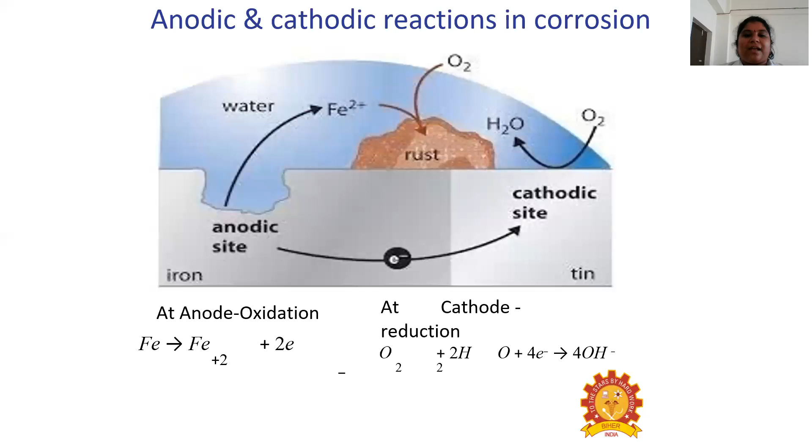But whatever the function may be, whenever oxidation occurs at the anode, the cathode gets rusted due to the reduction reaction occurring at the cathode, because the cathode accepts electrons while the anode loses electrons. Then coming to the anodic and cathodic reactions in corrosion, as we can observe in the diagram, at the anodic side corrosion is happening, but the rust is forming at the cathode side, as we discussed before.

Then what factors influence corrosion? Type of metal based on its nature - we have discussed this previously. Pure or noble metals won't get corroded in their pure state. So some metals like iron, steel, and similar ones will get corroded. So based on the nature of the metal present, corrosion will be influenced.

Then other factors include heat treatment and grain direction, presence of dissimilar metal, anode and cathode surface area, temperature, presence of electrolyte, availability of oxygen, and time of exposure to the corrosive environment. So these are the factors which will influence corrosion.

Then coming to the types of corrosion. First, pitting corrosion - pit means a small inversion. This type of corrosion starts with a small pit, which increases in size until the entire metal gets destroyed. This type of pitting corrosion is seen in metals like aluminum, magnesium alloys, and copper alloys. It starts as a small space and then widens shallowly, eventually destroying the entire metal.

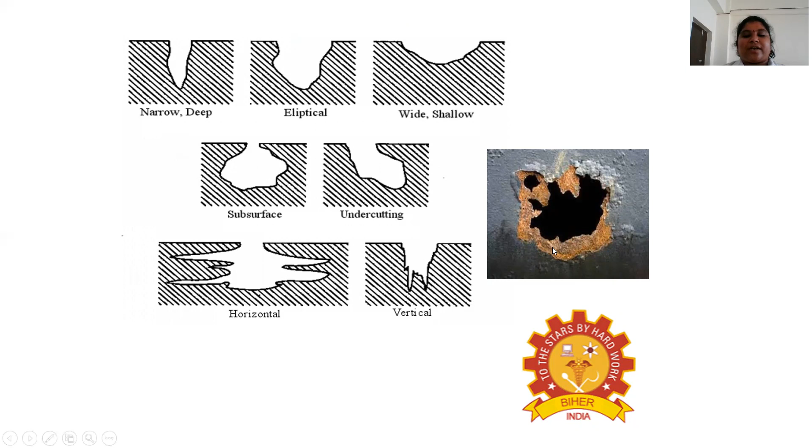Coming to the mechanism of pitting, whenever there is a large cathode and a small micro anode, corrosion happens at the place of that small micro anode, while the cathode gets rusted. What factors influence pitting corrosion? Alloying elements - based on the presence of the type of metal we commonly use as cathode and anode, its alloys will also influence the pitting corrosion.

Surface finish matters for corrosion resistance—a smoothly finished surface won't get easily corroded, while an abrasive surface will corrode more easily. Also, if heat is more, corrosion can be prevented; if less heat is present, more moisture will be there, leading to wet corrosion.

These are the factors influencing pitting corrosion. Another type is stress corrosion and season cracking. As the name indicates, corrosion happens because of stress, nothing but the weight of the sample present on the metal. This is commonly seen in transport services, where we keep weights to move things from one place to another. Because of the more weight on the metal, it will break, and because of that, corrosion happens.

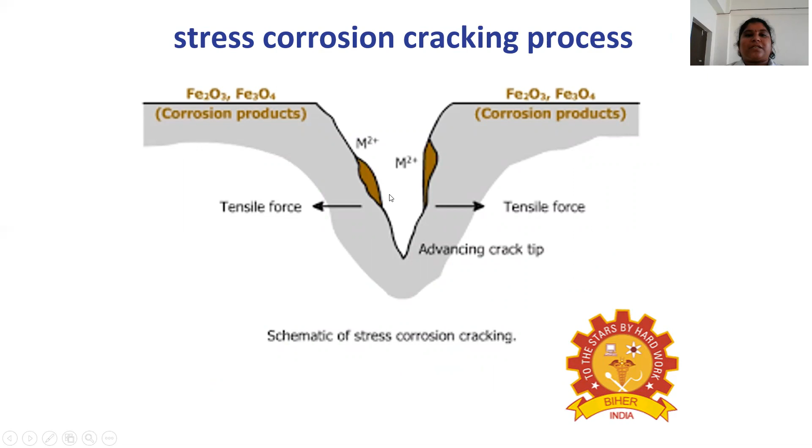It is a combined action of corrosion environment and mechanical stress, which occurs due to poor design or poor maintenance practice. Stress corrosion and cracking is caused by poor design of the metal. Initially there will be breakage because of poor tensile force of the metal, and then cracking forms; at the place of cracking, corrosion starts. That's why we call it stress corrosion and season cracking.

The mechanism involves the corrosive environment, tensile stress of the metal, and susceptible material. Because of these three factors, it will show stress corrosion.

How can we control or prevent stress corrosion? Control of stress level and hardness—whatever material we keep for weight or transport, we need to keep the weight or load according to the tensile force of the material being transported. So controlling the stress level and hardness, avoiding chemical reactions that cause stress and season cracking, controlling temperature, and modifying the design will reduce stress and season cracking.

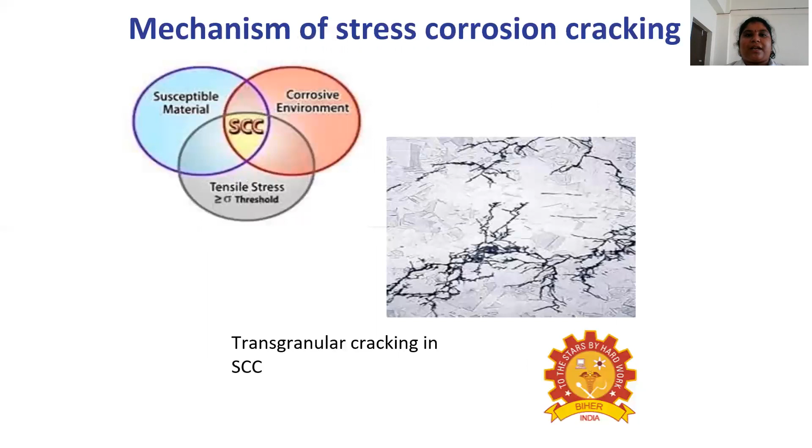So from the start we have seen different types of corrosion and the mechanism of corrosion with its different types. Overall, what is meant by corrosion? It is a natural phenomenon which attacks the metal.

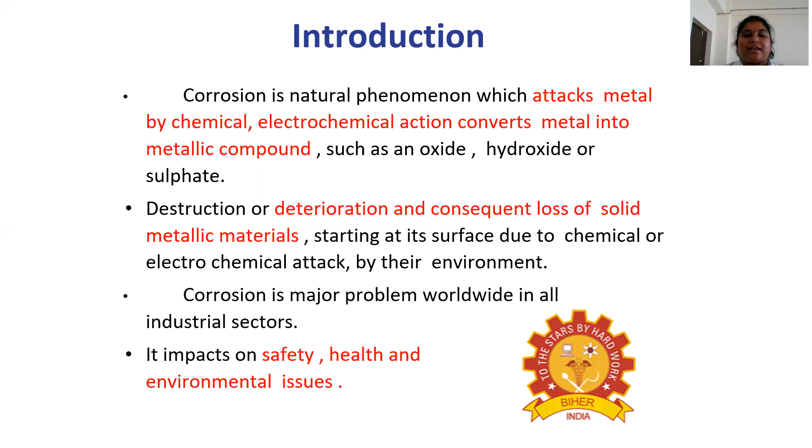Corrosion happens in metals only, where the metal changes from a metallic state to a metallic oxide state due to chemical or electrochemical reaction. This results in the destruction or deterioration of the metal. This is considered a worldwide problem—it impacts safety, health, and environmental issues.

Why does it happen? Whenever corrosion happens, the metal loses its energy and forms metallic oxides. To prevent corrosion, whenever you provide some energy to that metal, it will be free from corrosion.

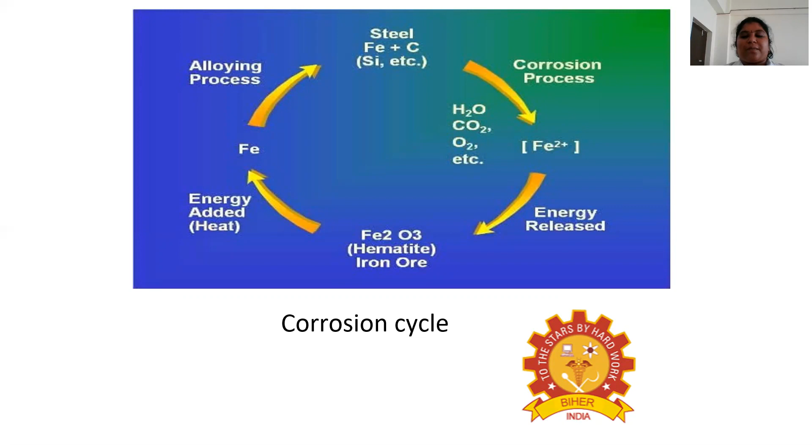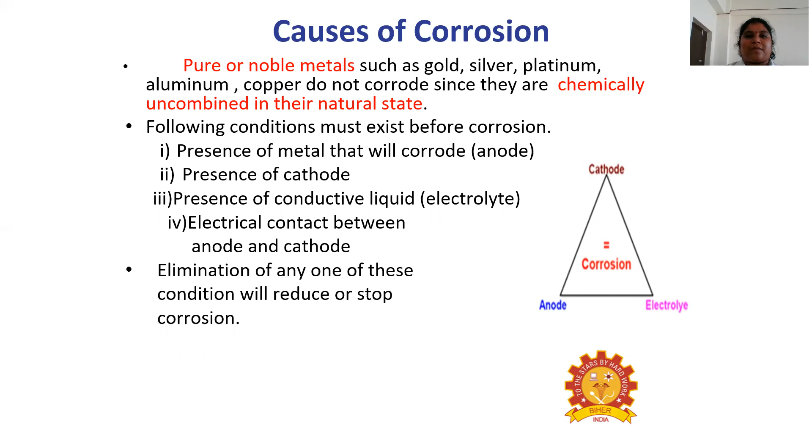What are the causes of corrosion? The presence of a particular type of metal that can corrode as the anode, presence of a cathode, presence of a conductive liquid, and electrical contact between the anode and cathode. Elimination of any of these can reduce corrosion. Some metals won't corrode, like gold, silver, platinum, aluminum, and copper.

This is the corrosion triangle. The main two reasons are atmospheric air and moisture present in the environment. Elimination of either air or moisture from the metal environment can prevent corrosion.

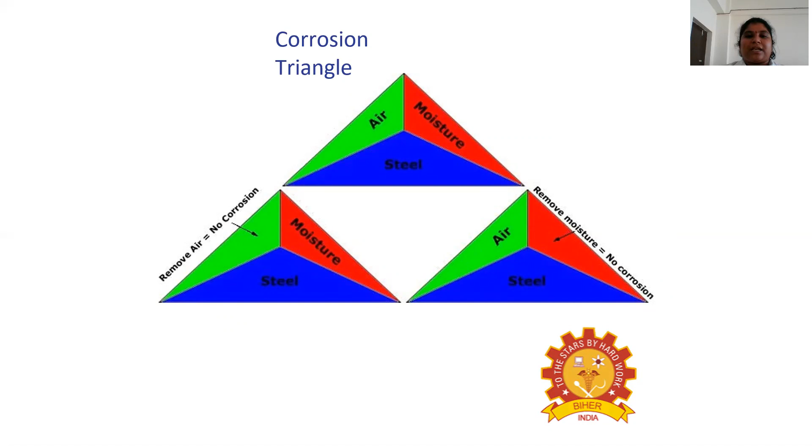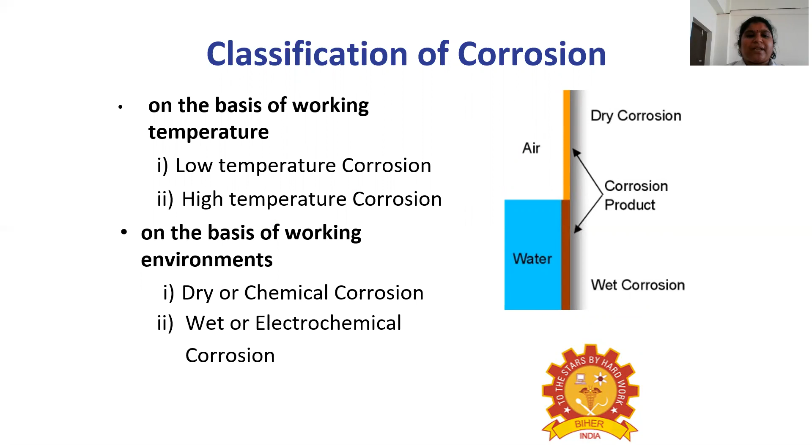Corrosion is classified based on two types: based on the working temperature, and based on the working environment. Some metals are sensitive to low temperature and some are sensitive to high temperature. Based on the working environment means based on whether it's a dry chemical or wet chemical environment.

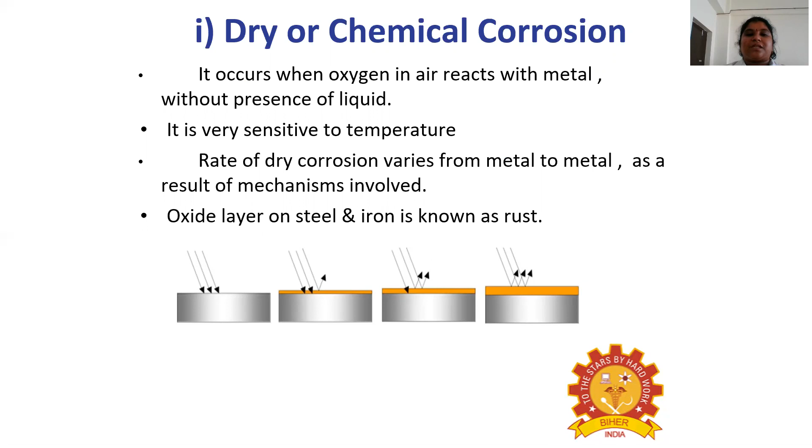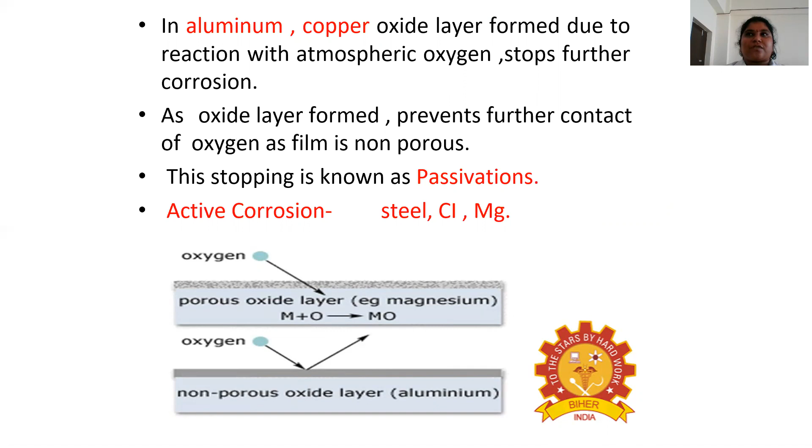The oxide layer on steel or iron we call rust. In aluminum and copper, the corrosion forms an oxide layer that is in non-porous form. This type of corrosion is called passivation, because the non-porous form stops further corrosion of the material. Active type of corrosion can be seen in metals like steel, cast iron and magnesium.

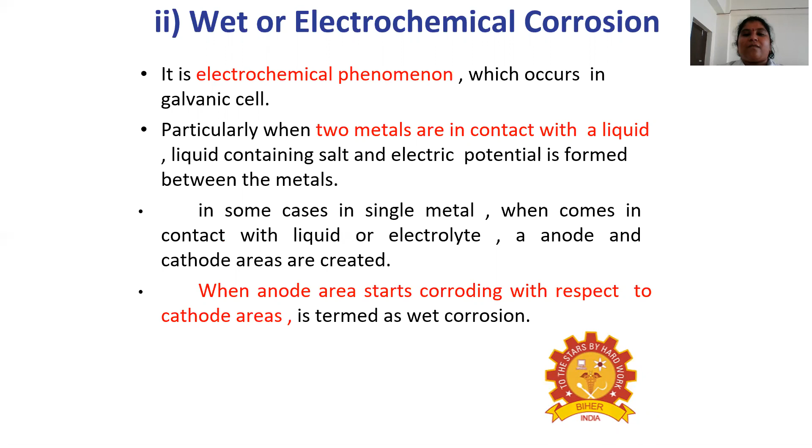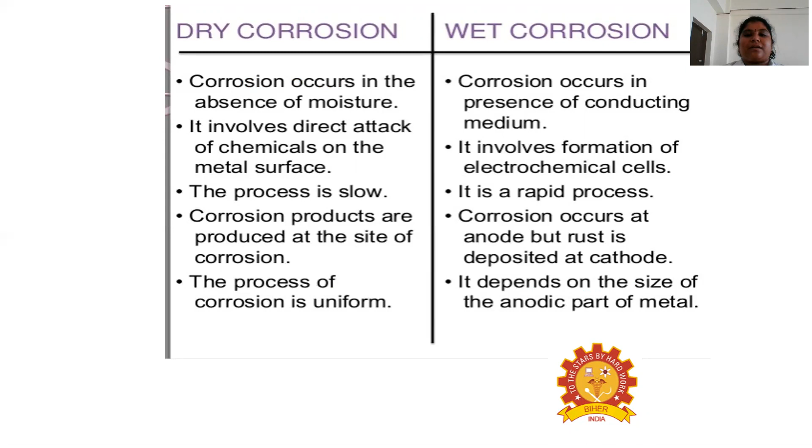The main differences between dry and wet corrosion: in dry corrosion there is absence of moisture, in wet corrosion there is presence of a conducting medium. In dry corrosion it is a direct attack of chemicals on the metal surface; in wet corrosion it involves formation of electrochemical cells. Dry corrosion is a slow process, while wet corrosion is a rapid process. In dry corrosion the product forms at the site of corrosion only, but in wet corrosion, corrosion happens at the anode and rust happens at the cathode. The process of corrosion is uniform in dry corrosion, while in wet corrosion it depends on the size of the anodic part of the material.

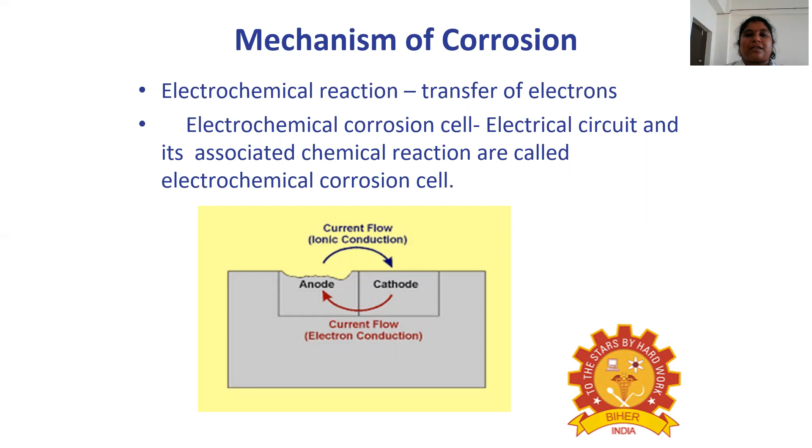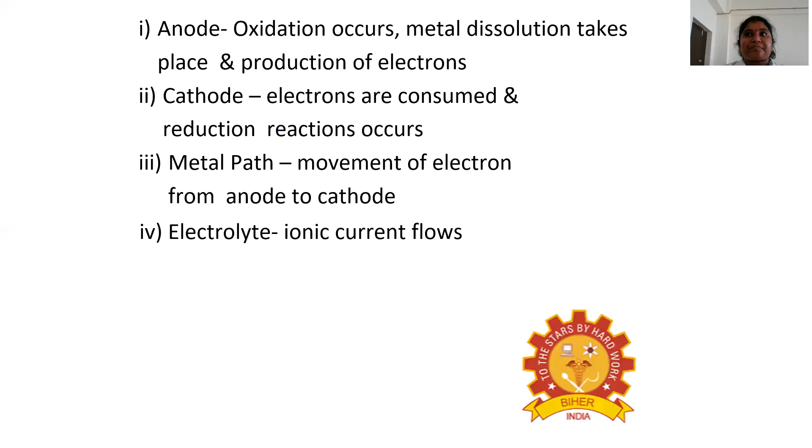In the different mechanisms of corrosion, electrochemical reaction occurs due to the transfer of electrons from one electrolytic cell to another through an electrical circuit. That's why electrochemical corrosion cell happens due to anode oxidation and cathode reduction, and this corrosion happens as wet corrosion.

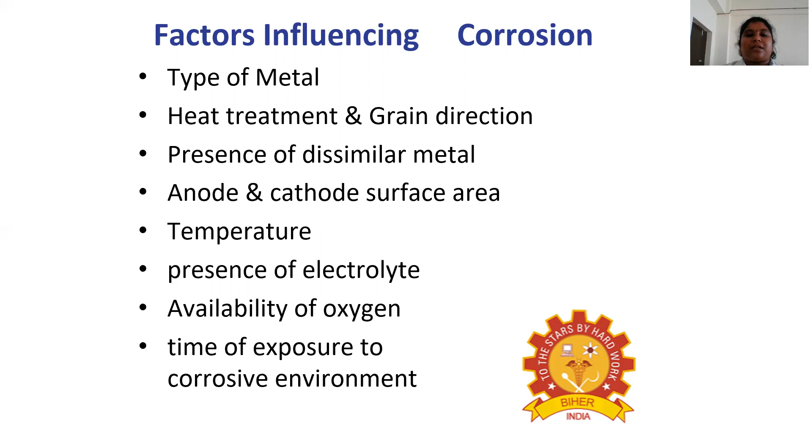Factors influencing corrosion are: type of metal and heat treatments, grain direction, presence of a dissimilar metal, anode and cathode surface area, temperature, presence of electrolyte, availability of oxygen present in the atmosphere, and time of exposure to the corrosive environment.

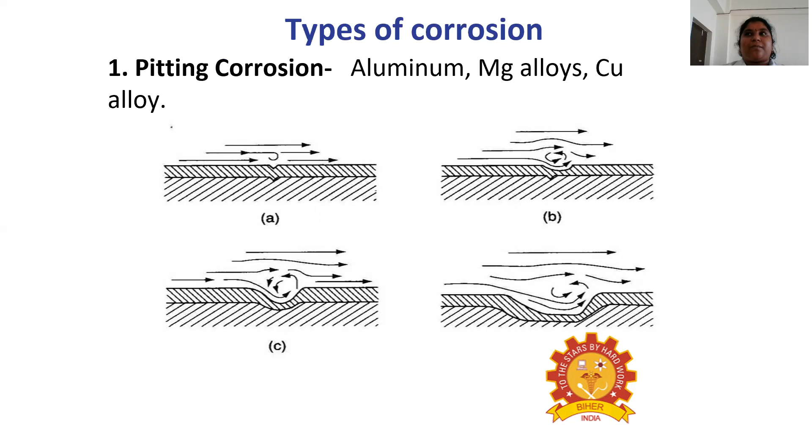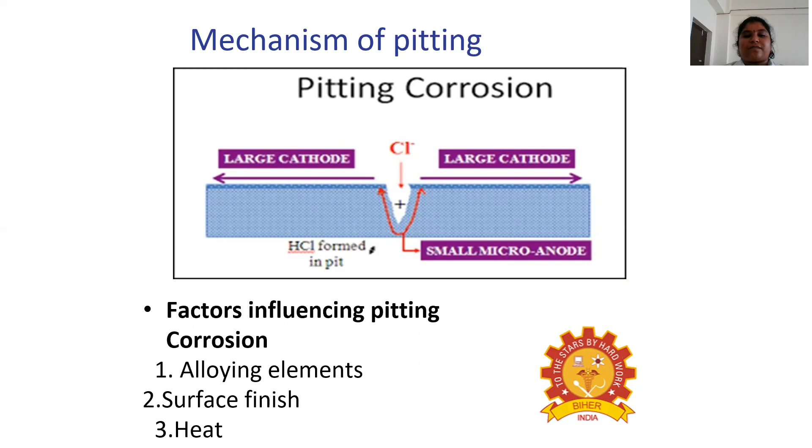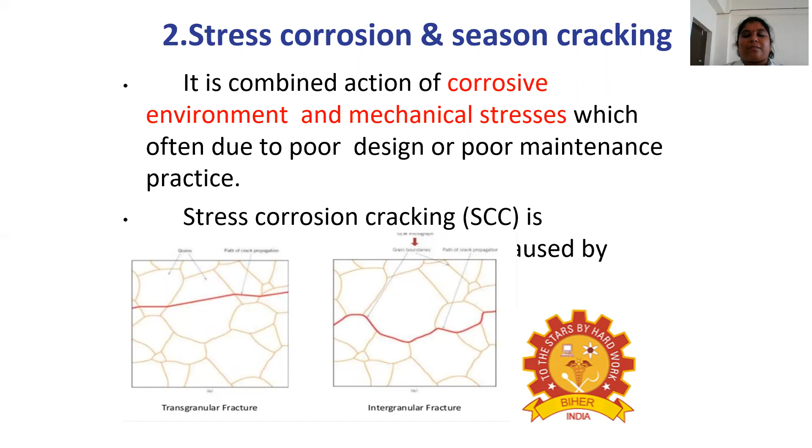Stress and season cracking results from poor tensile force and the design of the equipment. These are the mechanisms, and how we can control or prevent stress and season cracking is by controlling the stress level and hardness of the material, avoiding chemical corrosion that causes stress and season cracking, controlling temperature, and finally modifying the design to reduce the causes of stress and season cracking corrosion.

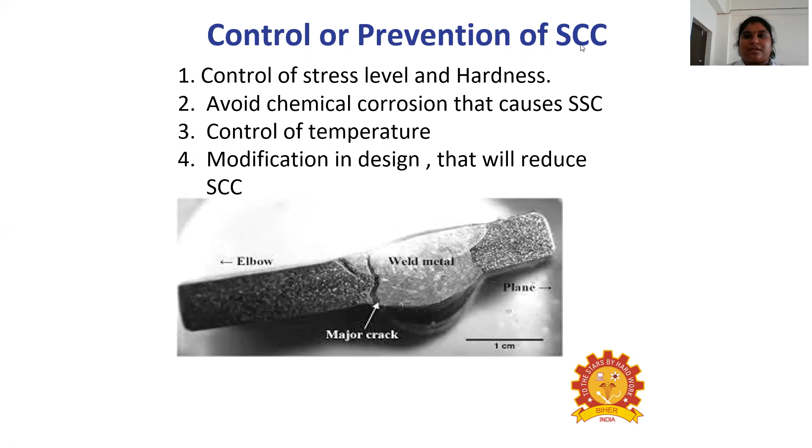So this was the topic. This is the last topic which will end the video lecture.